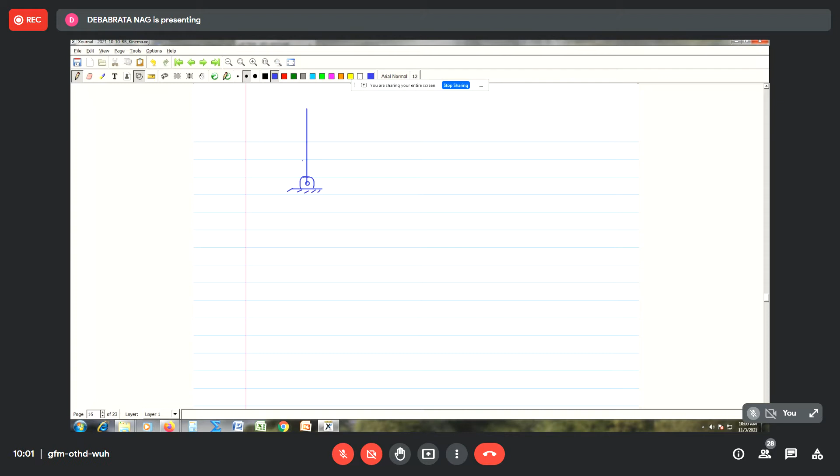In order to explain this, let me just introduce one page here, what is actually meant by that. Let us consider that we have a rod. This rod is pivoted at this point, and the rod is rotating with some angular velocity and some angular acceleration. Say this is omega, and let us suppose that this is omega dot.

Okay, so now we consider on this rod a slider. Now this slider is having a relative velocity. Either this slider can move in this direction, or alternatively it can have the downward motion as well, correct?

And the angular velocity can be this way or that way, and the angular acceleration can be this way or that way. The velocity with which the slider is moving on this rod can also be upward or downward like this.

And you see that if you want to calculate the velocity of the point A, which is belonging to this slider, what you need to do is consider a reference frame which is to be mounted on this rotating rod. Let us suppose that we place a reference frame. Say this is the reference frame x-axis, and this is the reference frame y-axis. The origin of this reference frame is here at this point O. And this reference frame x and y is rigidly connected to this rotating rod.

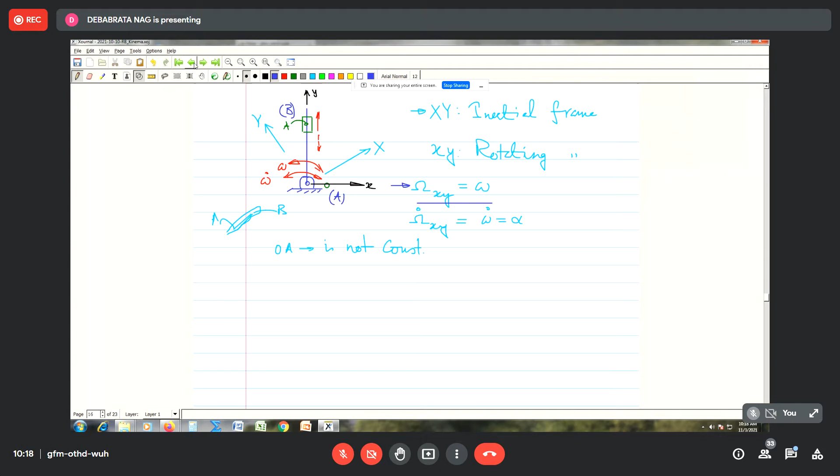But the person situated on the rotating reference frame is just observing the change in magnitude, the distance between them. So there are two concepts: differentiation with respect to the magnitude, and differentiation with respect to the direction. Both are done when you differentiate with respect to the inertially fixed reference frame. So this derivative will have two components: one takes care of only the change in magnitude, and the other takes care of the direction change of this vector.

So how is the direction change in the vector obtained? It is obtained by taking the cross product of the angular velocity of the reference frame with this position vector. Let us explain this with an example. Suppose this is the rotating reference frame and this is the vector AB bar, representing position vector B relative to A. Let us call this our A bar vector. At any point of time, A bar can be written as Ax i cap plus Ay j cap.

When you differentiate this vector with respect to the inertial reference frame, breaking up this differentiation, you see dAx/dt with respect to big XY i cap plus dAy/dt with respect to XY j cap, that normal differentiation. But you will also have differentiation of the i cap unit vector and the j cap vector with respect to the inertial frame, so we can move on to the next page and see the other differentiation there.

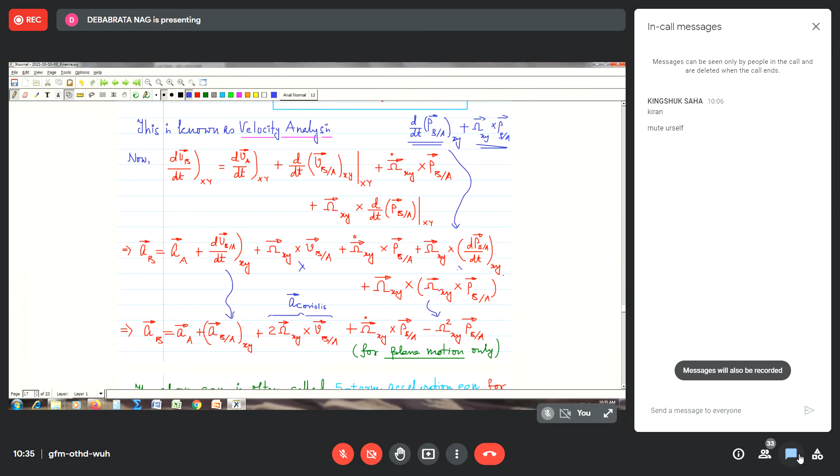So how many terms are there on the right hand side here? You see 1, 2, 3, 4, 5. So that's why this acceleration equation is called a 5-term acceleration equation. So again, if you do not take into account the rotating frame, then with respect to the absolute, I mean to say non-rotating frame, your equation comes down to these two terms, because this omega xy, all these terms will not be there.

So this will be brought down to this term, and you know that this term will be having two components. One is the normal component, another is the tangential component, about which we have already learned and solved problems in our previous non-rotating frame. So this is what is called the more general 5-term acceleration equation for our body. The above equation is called a 5-term acceleration equation for plane motion. This is called acceleration analysis.

The above 3-term and 5-term equations for velocity and acceleration are applicable to the problems involving relative motions as observed from a rotating reference frame. So that we need to understand. This is about the theory. So we have the 3-term velocity equation and 5-term acceleration equation, which we will be using in solving problems. So let's take the first example from the textbook.

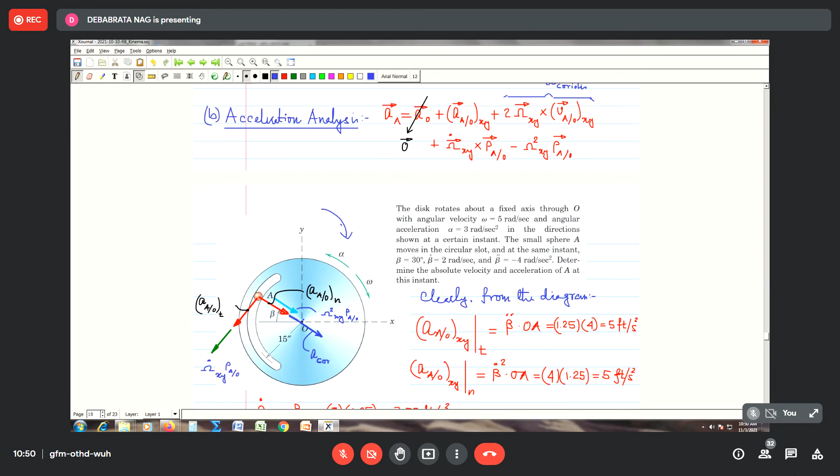Now you remember from the velocity analysis, the angular velocity is of course in the clockwise direction. Angular velocity is in this direction. And the relative velocity of A with respect to O was in this direction because your beta dot was clockwise. So this is a little bit involved. Beta dot, the relative velocity is in this direction and your angular velocity is in this direction.

So what you need to do, you need to take the cross product of this vector. I draw it in a three-dimensional manner. See, this vector means that it is vertically down. And this vector, say this is the z axis. Let us say this is negative z, and let us say that this is small x. So you take the cross product of negative z and x.

So z cross x will be equal to what? Z cross x will be equal to y. Y means in this direction, right? But since you have negative z, the actual direction of the Coriolis will be in this direction. This is your Coriolis direction because this represents the relative velocity and this axis represents your omega xy. So if you take the cross product between this vector and this vector, your Coriolis will be like this.

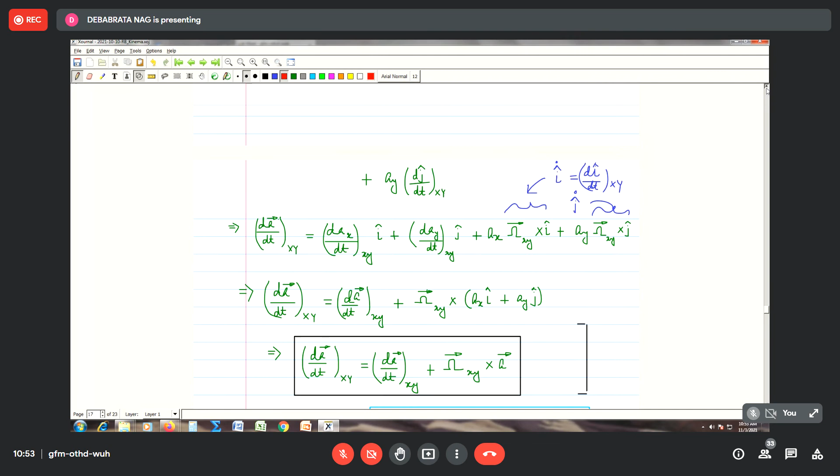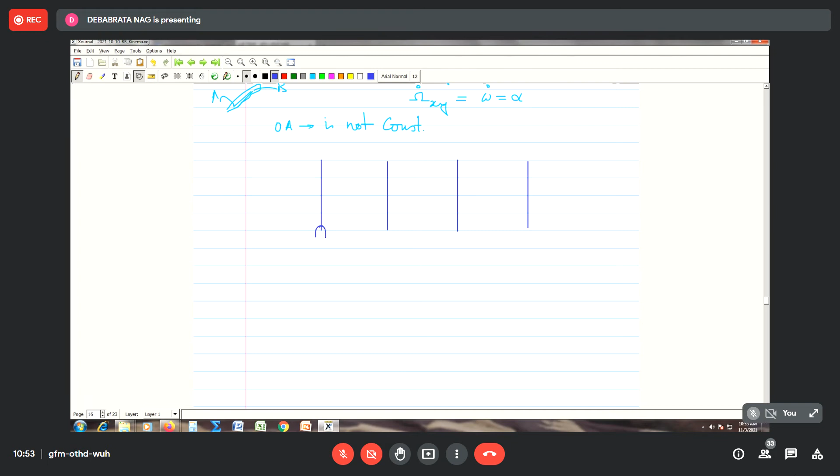In this respect, I can help you by drawing a table, if you need to remember it. Let us go to that extra page that I created here. Suppose you consider 4 situations: situation 1, 2, 3, and 4. These are all rotating rods. And I consider 4 possible combinations.

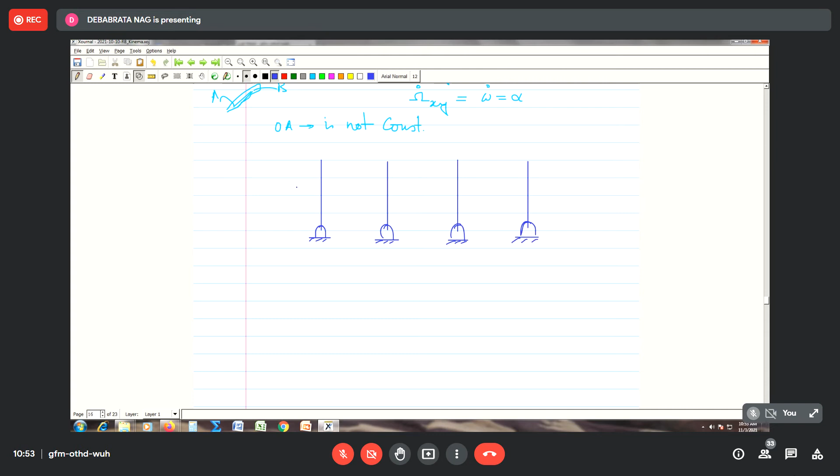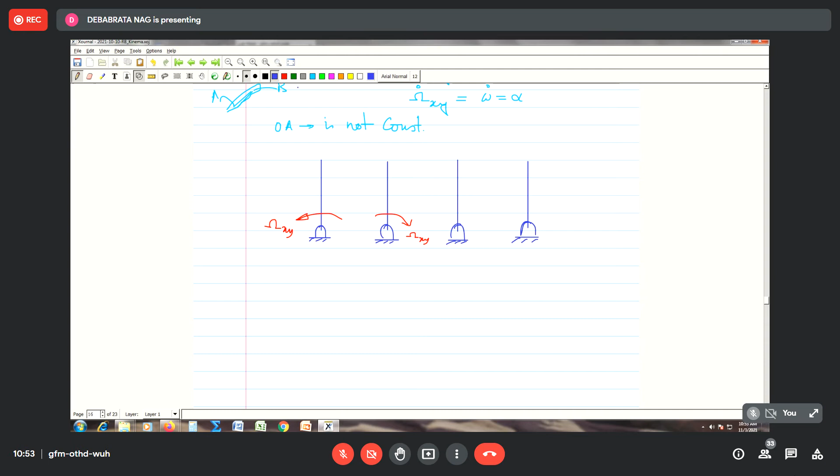First, I assume in this direction you have omega xy. Here I have the slider. Let's fix the slider; it is like this. I just draw 4 sliders here very quickly for you. And the possibilities are that this slider has this relative velocity, V rel with respect to small xy. Here this arrow is in this direction, and here this arrow is in this direction.

Now let us suppose this rod is rotating with omega xy in this direction, and this relative velocity is in the downward direction. And then this is rotating in this direction, omega xy, and this has a downward direction. These are the only 4 possible cases of Coriolis. Now you analyze the first one. This omega xy is positive because it is coming outward from the plane of your figure.

And the relative velocity is this, which means your Coriolis component, I draw it with a black pencil, will be this. This will be the direction of A Coriolis, A-C-O-R. In this case, one of the factors is reversed, so Coriolis will be towards that side. In this case, again, one of the factors is negative, so your A Coriolis will be this. And in this case, both factors are negative, so the product will be positive, and this will be the direction of Coriolis.

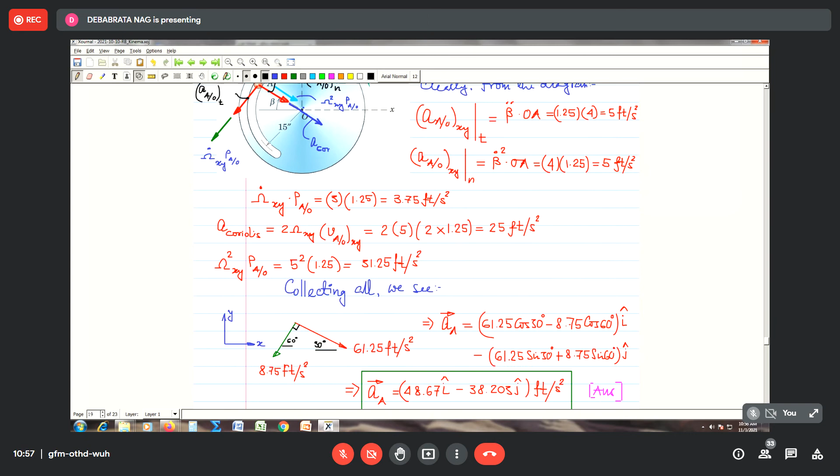So you just see here, the Coriolis here is inside. This is what you are getting. This is your Coriolis component. And similarly, you calculate the remaining components. Remaining components are very simple. Now collect them all and express them vectorially. It is a very simple task for you. Just collect all these terms.

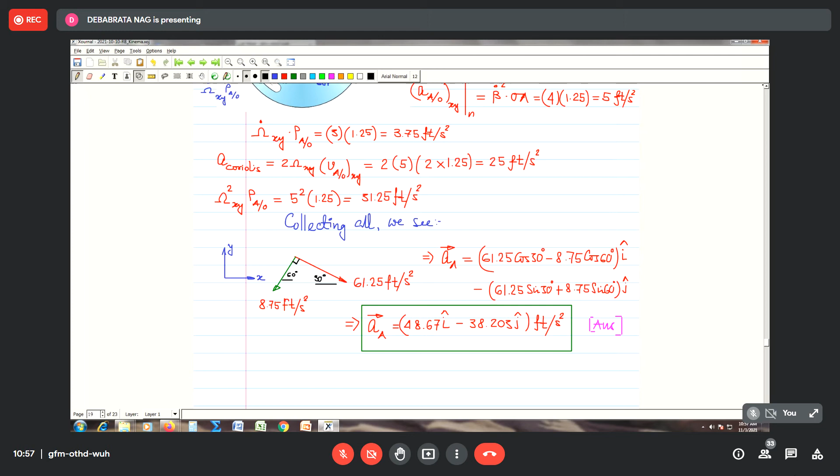And then simplify, express them in i and j cap manner, and you will be able to establish what will be your acceleration of the point A. That is the absolute acceleration of the point A. That means the absolute acceleration of the sphere, which is having this relative motion inside this circular slot.

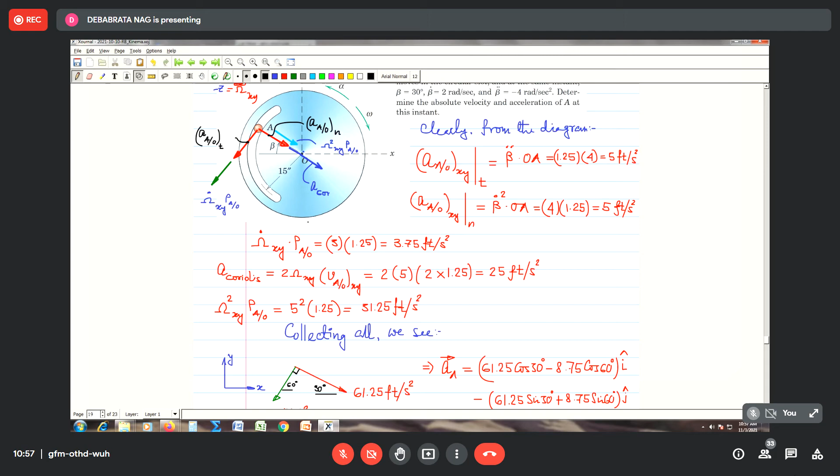So students, you can understand the analysis is a little bit difficult, but you need to keep your cool and turn by turn, you need to evaluate all of them. But here, in this case, we have solved the problem completely analytically. Now, we will show you another example where this problem will be solved in a semi-analytical approach.

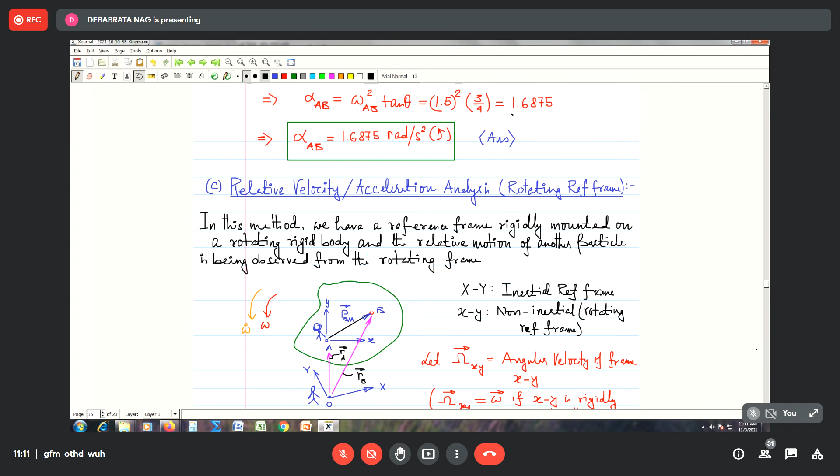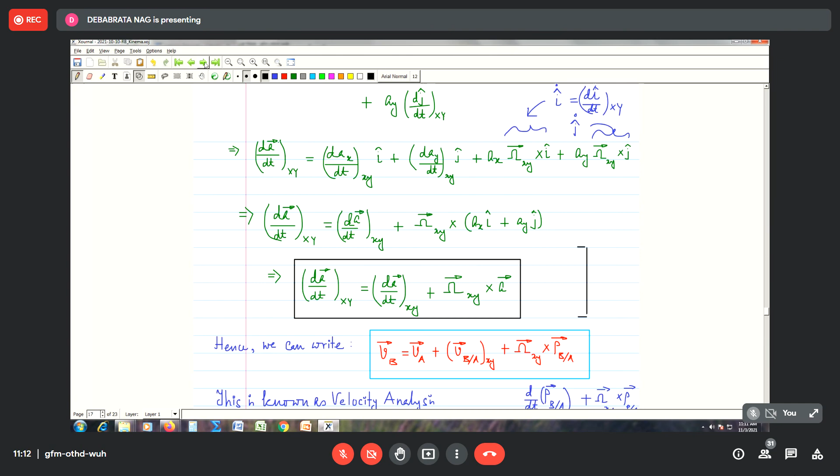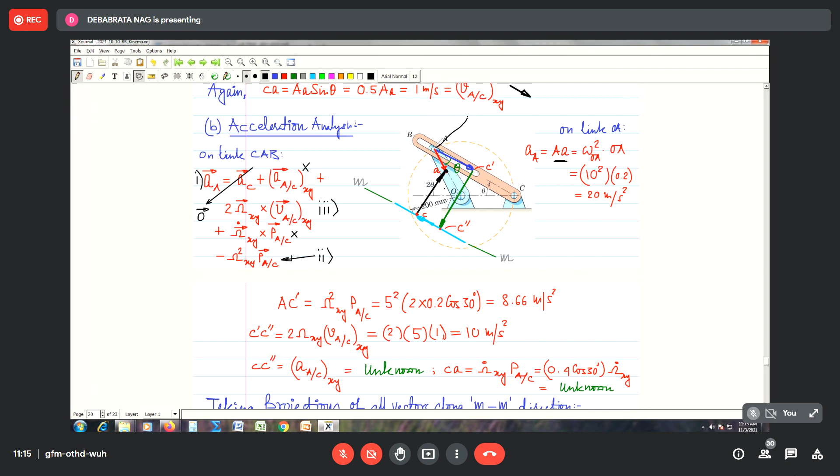So you see this plus this plus this must be equal to this. So you can understand from here that your relative acceleration is away from C and your tangential acceleration, angular acceleration of this link will be in the clockwise direction, because you see this is moving up. That means mentally, if you put this vector at this point and give the arrow, it will show that this will be rotating in the clockwise sense.

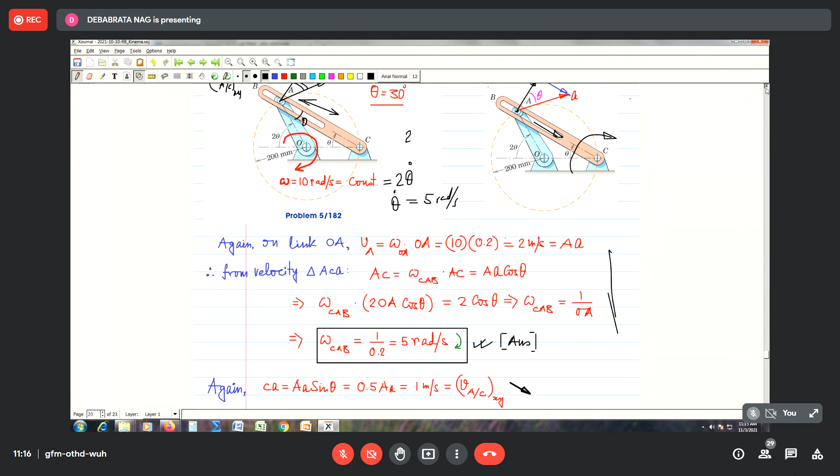So I can therefore find from this diagram that the relative acceleration is away from C and the angular acceleration of this link must be in the clockwise direction. So these two conclusions are drawn, but I do not know their magnitudes. So I identify them. This is one unknown and this is one unknown. My objective here was to find out two things: determine the angular velocity of the slotted link, which we have already done, and find the acceleration of A measured relative to the slot in CB.

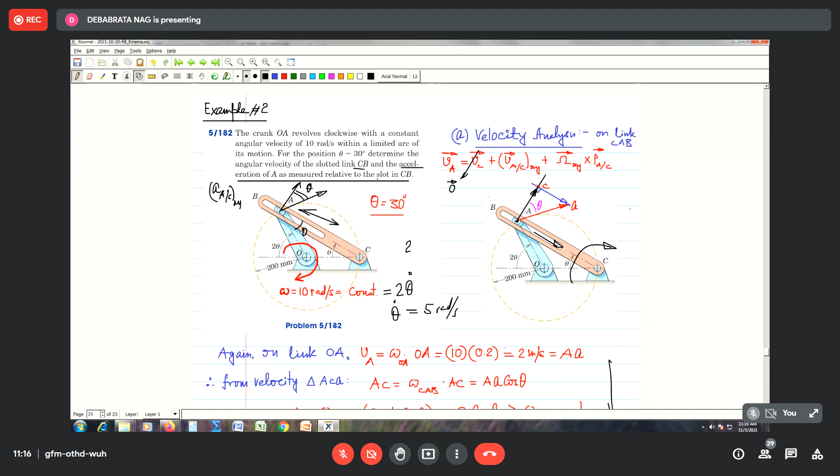Okay, so our objective is to find out this blue vector. This C double dash C is our desired unknown. They have not asked what is the angular acceleration of this slotted link. I will put this to your homework. Solve this to find out the angular acceleration. However, I have not solved it here because my objective is only to find out the blue vector.

So what I do, I will take the projections of all the vectors perpendicular to this unwanted unknown. This black vector is the unwanted unknown. All right. We are not interested to get the angular acceleration of the slotted link. But the full question, Meriam's question, will be modified by DN sir, and the question will be that you need to find out both the unknowns. So that's why I 50% solve it for you, following our great teacher Meriam sir, and I will ask you to find out this black vector at your home.

So since our objective is to find out the blue vector, I take the projections of all these vectors along the line MM. So it means the projection of this red line on this should be equal to the sum of the projections of this one and this one. Correct? Because these two are perpendicular. So I am very relieved they are not coming and hampering me.

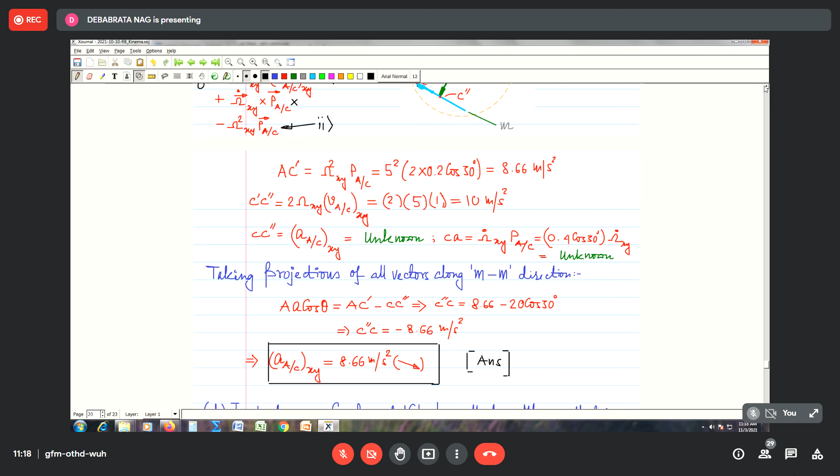So you see, the drawing of this particular acceleration diagram is a little bit difficult, but you need to keep your cool and simply work methodically. I have given you the algorithm.

First, try to locate the known vectors and then start drawing the known vectors through the pole. Say here, I have drawn this known vector through the pole. I know I could have started with this vector also. I mean to say, since the Coriolis is also known to me, I could have started with the Coriolis as well. So here I have not started with the Coriolis. I have started with the normal component of acceleration. See this one, the normal component, but it could have been rearranged.

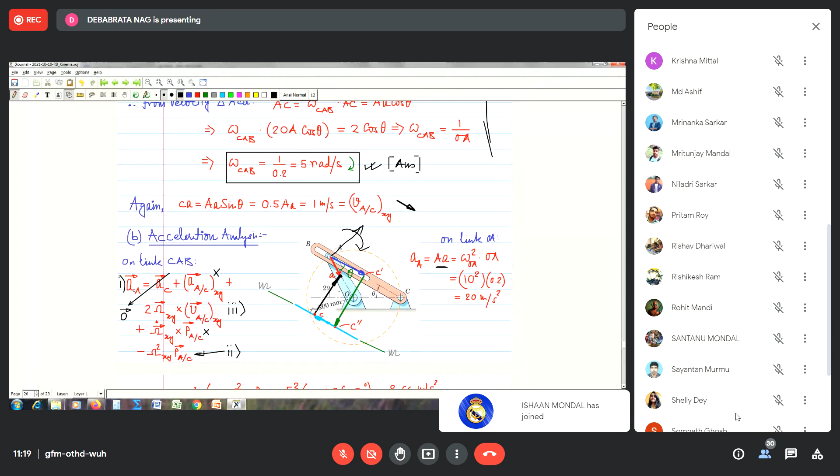So that rearrangement, I think you should do at your home with your experimentation. That means do not copy my figure, just try to redraw them by permutating. That means you see this is 1 I have drawn. Now you interchange these two, 2 and 3. First draw 2, then I draw 3. Interchange them, see how your polygon looks like, whether you are able to locate all the vectors or not. This you should experiment, and then only you will be having your concepts clear.

And again I am telling you, solve 2 to 3 problems from this chapter, particularly doing velocity and acceleration analysis both, so that the thing becomes completely defined for you, so that during the examination you do not have to fiddle around. You should not have this kind of hitch within your mind. That hitch you can remove very easily if you solve at least 2 to 3 problems from this book, taking separate problems, right? Do not go for very tough ones, because complicated figures we cannot give you within the stipulated time. However, if the examination is 24 hours, then no guarantee for the toughness of the question, that I need to be very clear.

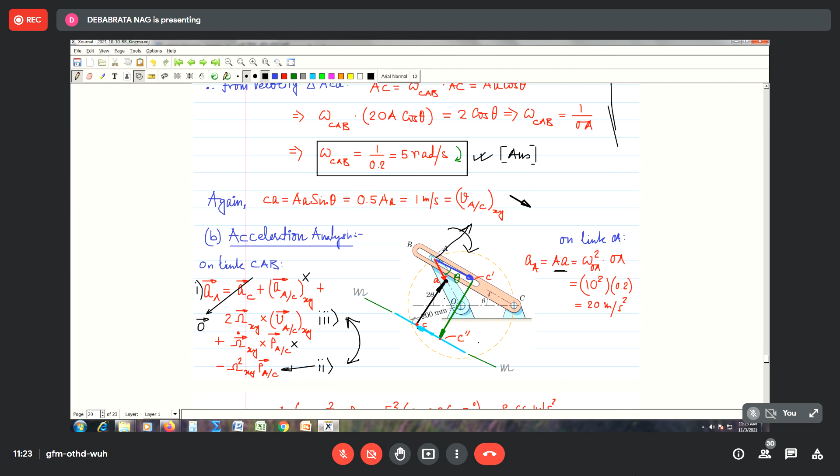So with this we come to an end of today's class. Before the Diwali break, we finish the relative velocity method, both the non-rotating frame and the rotating reference frame. After the break, when we will meet, we will take up the last method, which, I have already told you, is specific for velocity analysis. It cannot be applied for the acceleration analysis. That is known as the instantaneous center of velocity method.